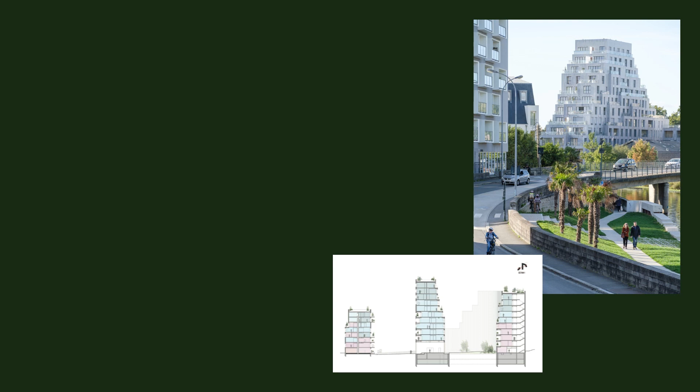Ascension Paysagère by MVRDV in Rennes, France.

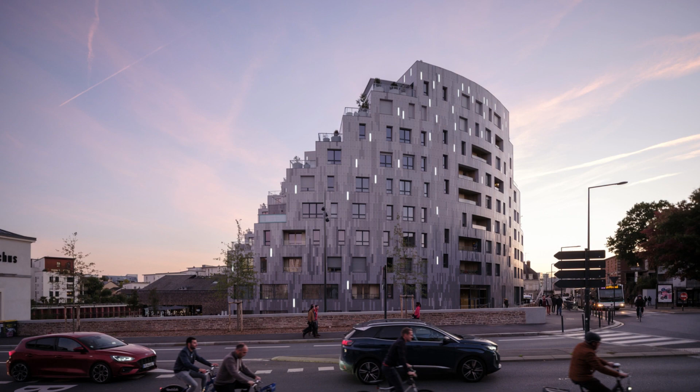MVRDV, along with co-architects for real estate developer Groupe Giboire, has completed Ascension Paysagère, a residential complex at the confluence of two rivers in the west of Rennes, France. Occupying a crucial transitional space between the Rennes center and its outer reaches, the 12-story, 8,200 square meter complex brings much-needed density in the context of the city's outward growth, providing 138 homes in a variety of sizes and price ranges, including 37 units of social housing, as well as commercial spaces and pleasant new public spaces in a green waterside environment.

In 2018, the French magazine L'Express called Rennes the most livable city in France, and, combined with the arrival of a new TGV connection in 2017, this attractiveness has led to continued population growth. The many heritage buildings in the city's center have shifted this expansion pressure outwards, requiring the periphery to grow either outwards into the countryside or, preferably, upwards with a pleasant approach to densification.

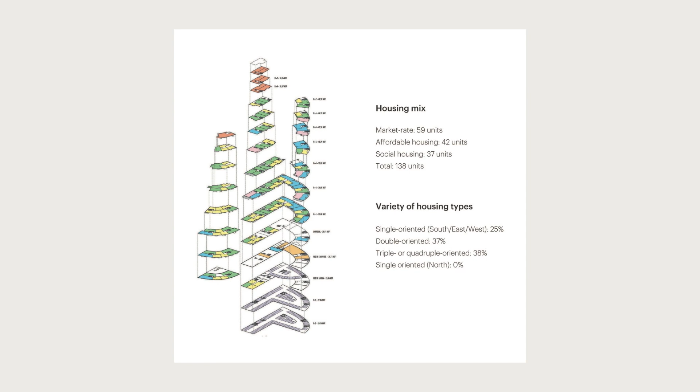Positioned precisely where the Ille River joins the Vilaine, across from the green floating park of the Jardin de la Confluence, at the end of the now pedestrianized thoroughfare of Mail François Mitterrand, Ascension Paysagère's highly visible location required an exemplary approach to this perimeter densification.

Ascension Paysagère takes inspiration from geological formations. The project comprises two curving buildings, one large and one small, with gradually receding slopes. By the river, and at points where the project approaches its neighbors, the buildings are low, acknowledging the expansive, low-rise context. Elsewhere, however, the design gradually steps up into three peaks, reaching the maximum 12-story height in the center of the site.

The terraces created by these gradual step-backs are decked with pots filled with greenery, extending the lush atmosphere of the riverbank upwards to the apartments even at the very top of the building. On the western corner of the larger block, in between the building's two peaks, a garden including fruit trees emphasizes this green approach.

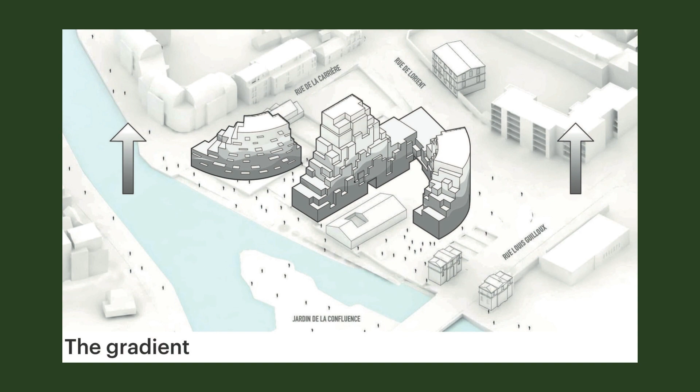The facade reinforces the connection to geology. It features both matte and glossy ceramic panels in 5 different tones of gray, arranged into stratified layers, dark and mostly matte near to ground level, and lighter and glossier at the top levels. At night, lighting reinforces this effect, with more lights integrated into the ceramic panels at the top of the building. As a result, the design seems as if it truly belongs, an outgrowth of the environment itself, which feels natural even as it significantly densifies this part of the city.

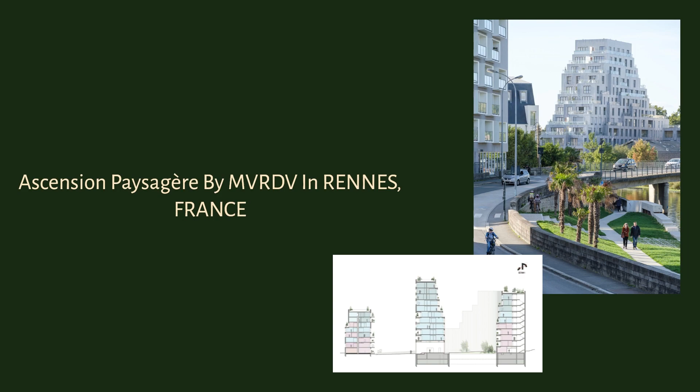Every apartment is provided with outdoor space, either a terrace, a balcony, or a loggia. Each of these comes complete with custom plant pots fitted with automatic irrigation as well as a dedicated water tap, to help residents care for their piece of the landscape. The terraces create a village-like atmosphere that allows residents to greet their neighbors above and below.

At ground level, the curves of the buildings define a series of public spaces, with a green pedestrian street between the two blocks and a plaza at the water's edge that leads to Le Bacchus, a restaurant and theater that is embraced by the curve of the larger building. The entrances to the larger building are found in 3 inviting, wood-clad passages that punch through the building, creating generous meeting spaces and providing views and access to a secluded garden at the rear of the theater restaurant.

At the entrance to the site, a former renovated tax office is included in the urban plan, making the public square a mix of 3 architectural periods.

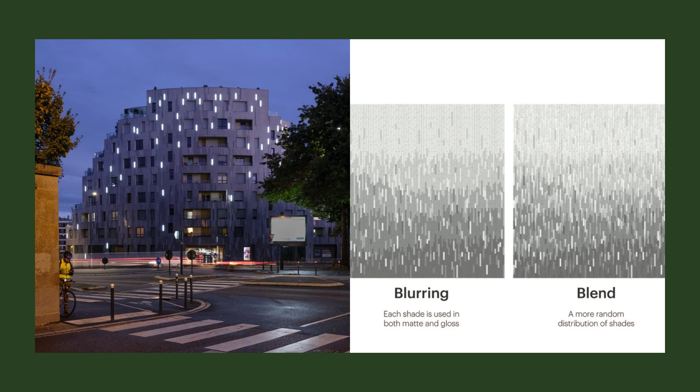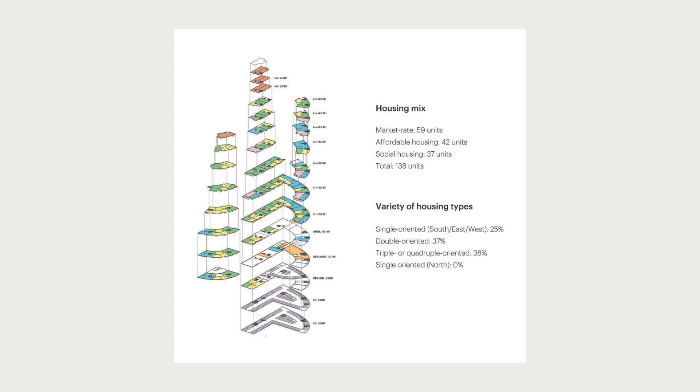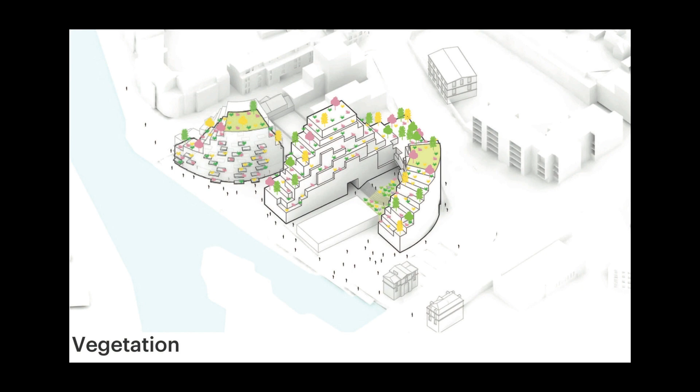The project uses a variety of approaches to ensure sustainability and social responsibility. Densifying an urban area reduces the city's need to expand into the surrounding landscape, and the parking garages include a total of 210 square meters for bicycle parking, including dedicated spaces for cargo bicycles and electric charging stations to encourage more sustainable transport options. The 34 apartments in the smaller building are completed to Passivhaus standards, giving them the potential to use dramatically less energy than typical apartments.

Many of the apartments are double or even triple aspect, with windows on multiple sides of the building to allow cross ventilation and excellent natural light conditions inside.